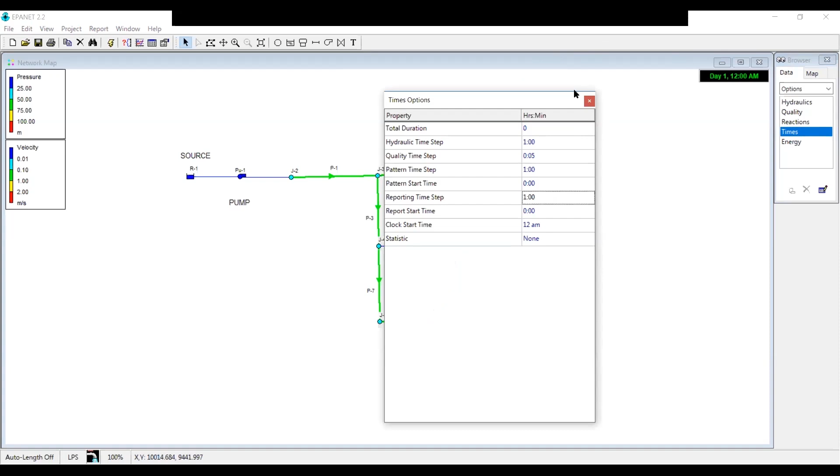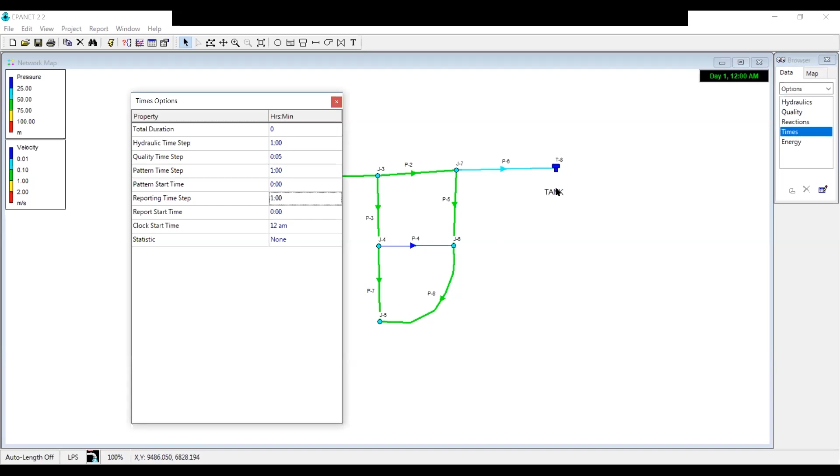Actually, this is the reason why we use tanks. The tanks work as daily regulators. In the night, the water will be stored in the tank, and in the morning, we will use the water in the tank. So by this way, I will not have to run my pump for 24 hours. Okay?

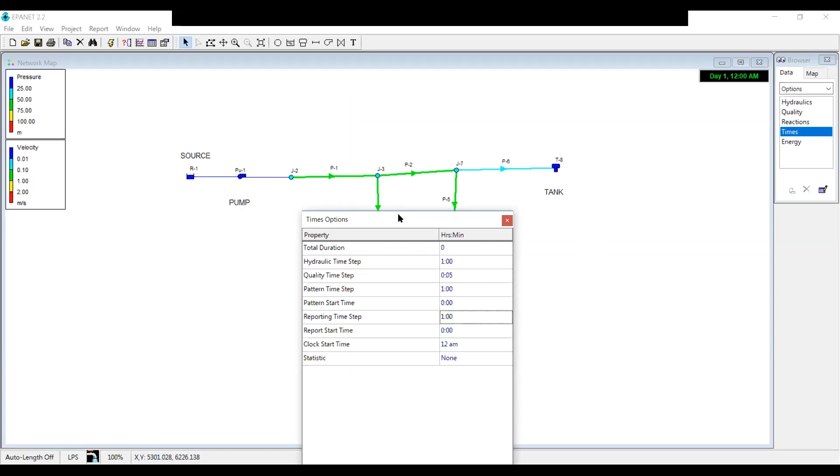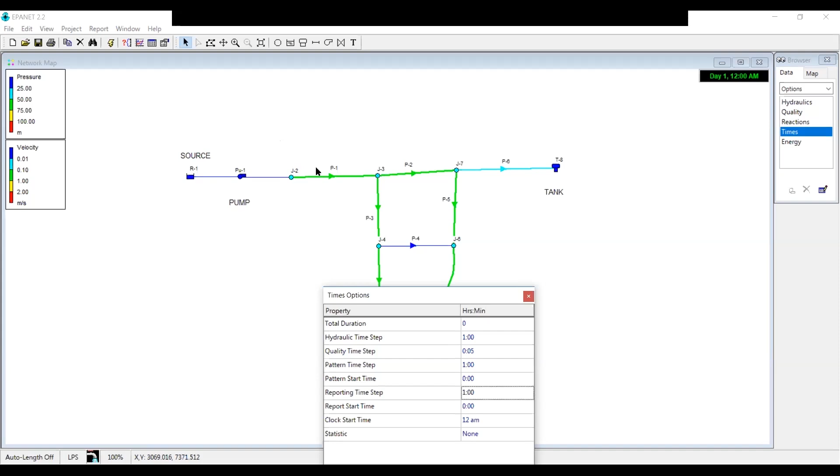But if your source is below your residential area, of course, you have to pump it. Okay? In that case, maybe you can put your tank here. Actually, these are the things that you will decide in the project. You will use your engineering judgment and you will decide these things.

Now, I want to run my system for 24 hours. Hydraulic time step. This is the time step that EPANET uses for its own calculations. This is not about me, this is about EPANET. But if you decrease this time step, it will be more precise. For example, let's give it 15 minutes.

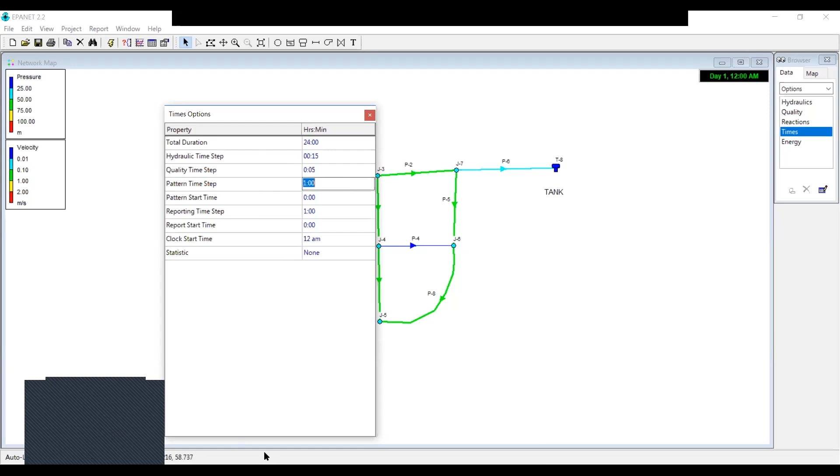Quality time step. EPANET can make water quality analysis, but we will not use it for this course, so we will not change this one. Pattern time step. Okay, you can take this pattern from the guide that I will share with you from the Turkish regulations. Now I will open it and show. This is the regulation that you will use. I will share with you.

It is Turkish, but most probably every group will have at least one Turkish member. So your Turkish member can read these numbers. Now I'm looking for the pattern that I'm mentioning. Yes, this one.

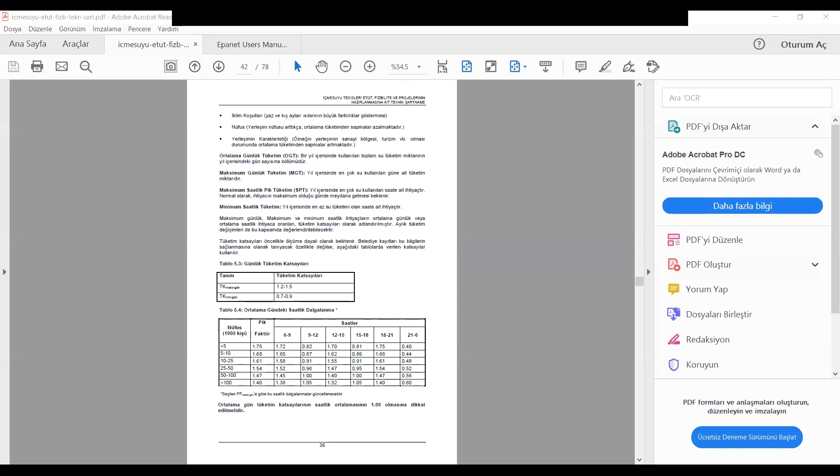This table says, for example, if your area's population is below 5,000, you can multiply the water consumption by these numbers. For example, the default number is 1, but in the times between 6 and 9 in the morning, water consumption is 1.7 times higher than the normal one.

Okay, so as we can see in this pattern, there are 3 hours, 3, 3, 3, but for this one only 9. So we can assume this one as 3 times 3 hours. You can add a new column here from 21 to 24, 0.4 again. From 0 to 3, 0.4, etc. So by entering these numbers to the pattern, we will obtain a new solution.

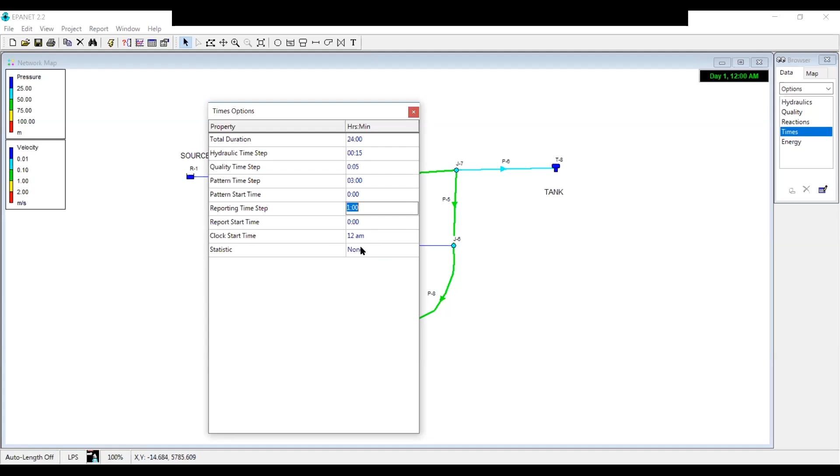I have written the pattern time step as 3 hours, pattern start time 0, reporting. Maybe I wonder what is the water consumption in the morning at 7:30, because if it is 1 hour, I can take only 7 o'clock and 8 o'clock, but I want the data at 7:30, so I want a precision of half an hour. Let's write 30 minutes, and the report will start from the beginning, clock start time. So your pattern will start from 12 a.m., from midnight. Okay, now we can close.

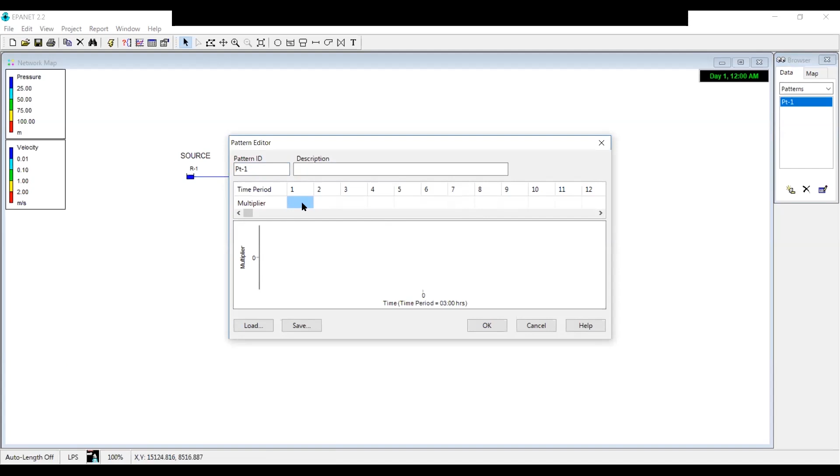And now we will describe the pattern. Browser, data, pattern. By clicking this one, we will add our new pattern. The multiplier. Now I will write the numbers which are in the Turkish regulations. It was 3 hours, so there should be 8 multipliers, because 3 times 8 is 24 hours. From midnight to 3 o'clock in the night, what was the multiplier? Please take a picture of this screen, and if I make it wrong, please correct me.

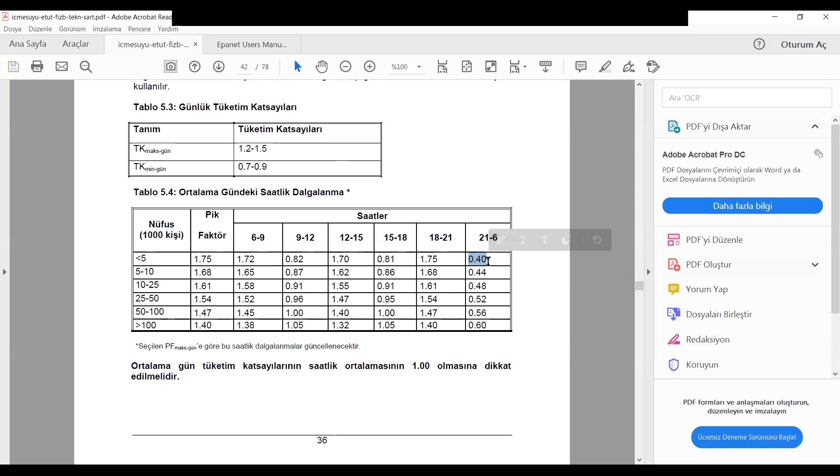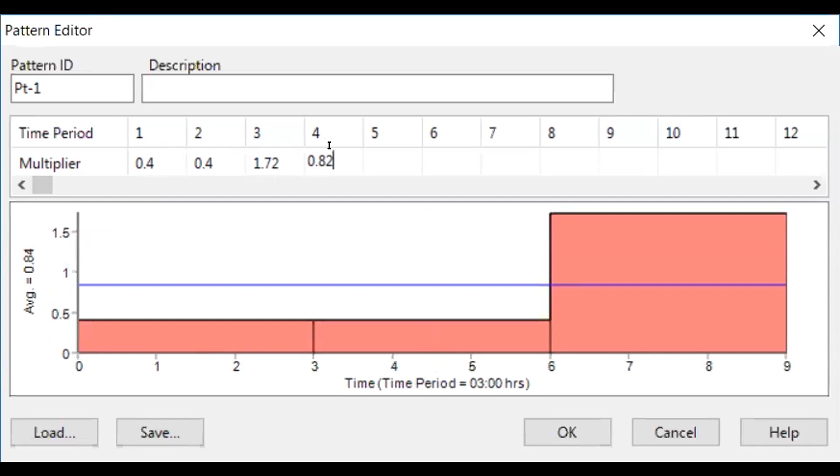From 21 to midnight 0.4, so that means from midnight to 3 again it should be 0.4. Okay, let's enter the values. 0.4. 2, this means from 3 to 6 o'clock, again it should be 0.4. This means from 6 to 9 o'clock. By the way, I am using population below 5,000, the first row. This is 1.72. This is 0.82. 1.7. 0.81.

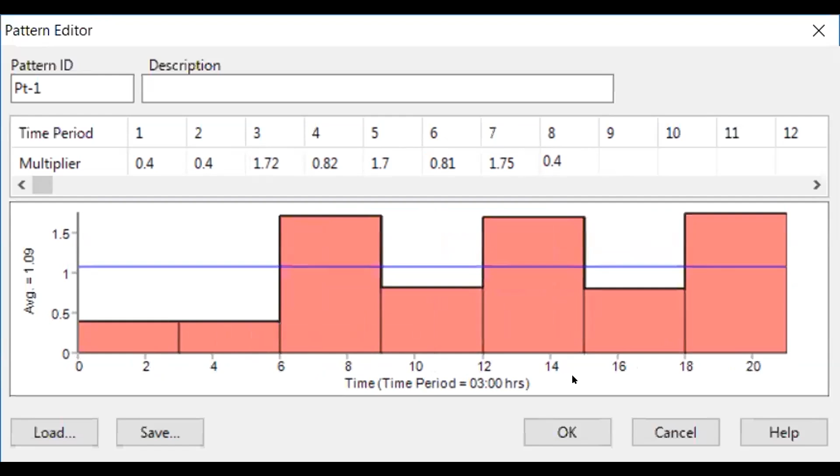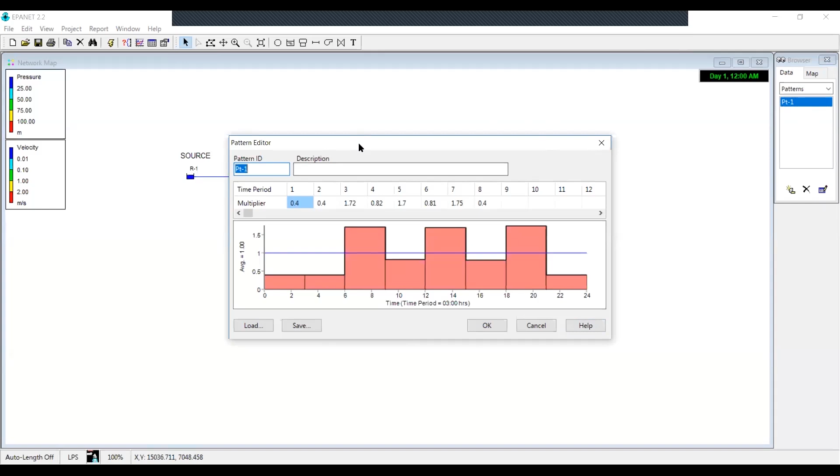1.75, and this is the last multiplier, which is in the evening from 9 o'clock to midnight, 0.4. Okay, let's check the pattern. Yes, I think the pattern is a pop-up window. It needs a new share. I am not sure whether you can see it or not.

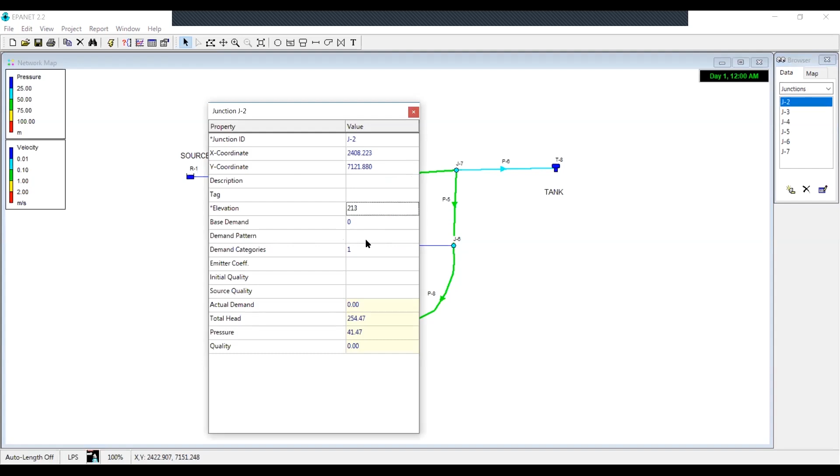Now I have described a new pattern, water consumption pattern, but my junctions don't know it, so I should inform my junctions. For example, double click demand pattern, nothing writes here. Now I will show you how to make changes of many things together. Edit and select all. Now I have selected all of the things in the screen, but I will just change the properties of the junctions.

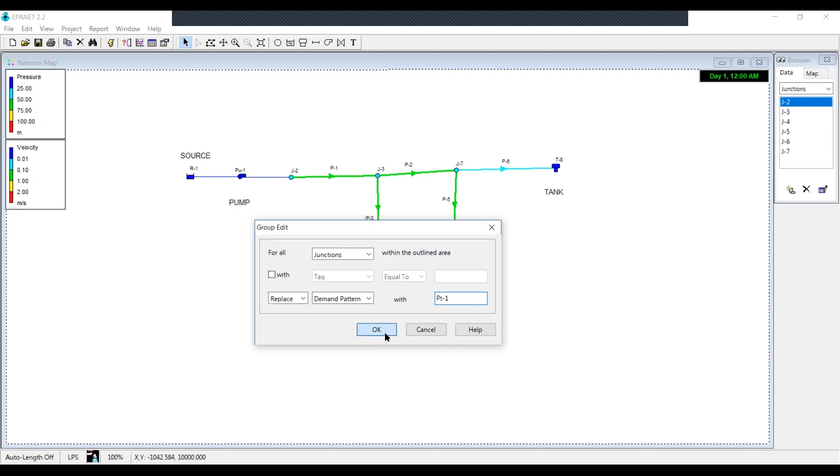Again, edit and group edit. Yes, you can see the little pop-up window, right? Yes, sir. Okay, for all junctions, replace demand pattern with... its name was, as I remember, PT1. Replace for all junctions, replace demand pattern with PT1. Okay. 6 junctions were updated. Okay, let's check. For example, this one, yes, demand pattern is pattern 1. Okay.

Let's run it again. Run was successful again. Okay. Now I can see at the time, at the beginning, 0 hours. But by sliding this one, I can see any result during the day. And by clicking this one, you can animate the results. Look, now the hours are changing. Look, the colors are changing depending on the daily consumption. Okay, so for example, at 9 hours, what's happening here, I can see.

And if you want to arrange the scale of these legends, you can right click it and you can arrange the colors here. In your project, you will take the values from the regulation. Again, the Turkish regulation, for example, says all the pressure inside the distribution system should be between, for example, 30 and 50 meter water columns. So that means you will arrange this green area because this is the acceptable area. For example, from 30 to 50. And you can arrange these ones. Okay. Now they are changed.

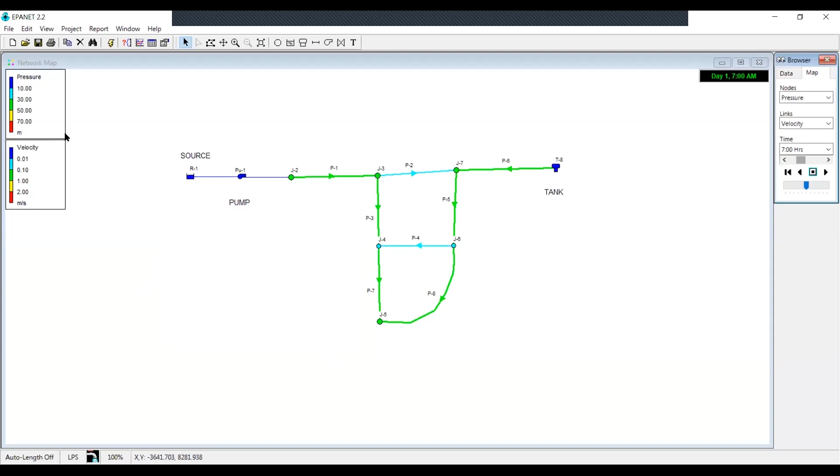And for example, the regulation says all the velocity in the pipes should be between 1 and 2 meters per second, for example. And you can arrange. Okay. And let's check these ones. For example, table. You can show the results as a table.

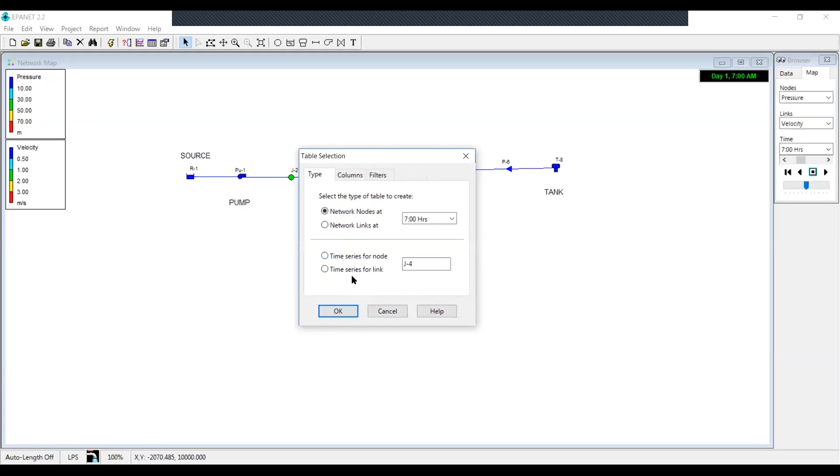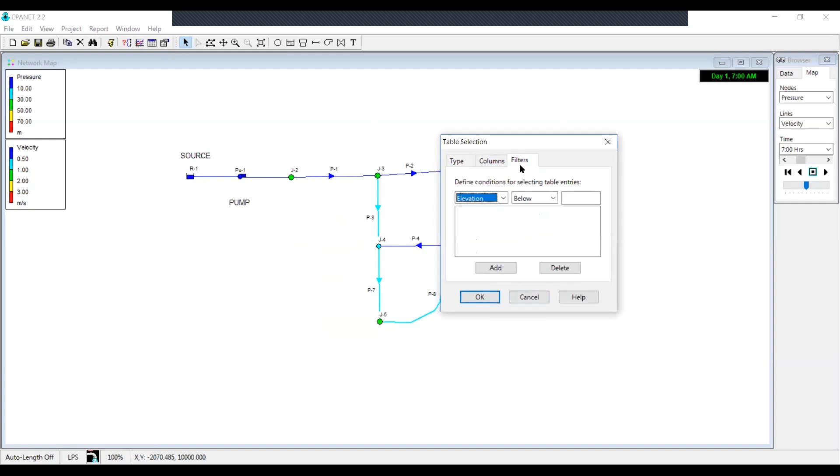For example, at junction 2, at this junction, which is just after the pump, time series for node: how does the pressure change during the day in this junction? I wonder that. So in the columns, I will just choose pressure, filter, no filter, click OK. Yes. At the beginning of the day, at midnight, the pressure is 45 meters. And it is changing during the day. You can observe the results from the table.

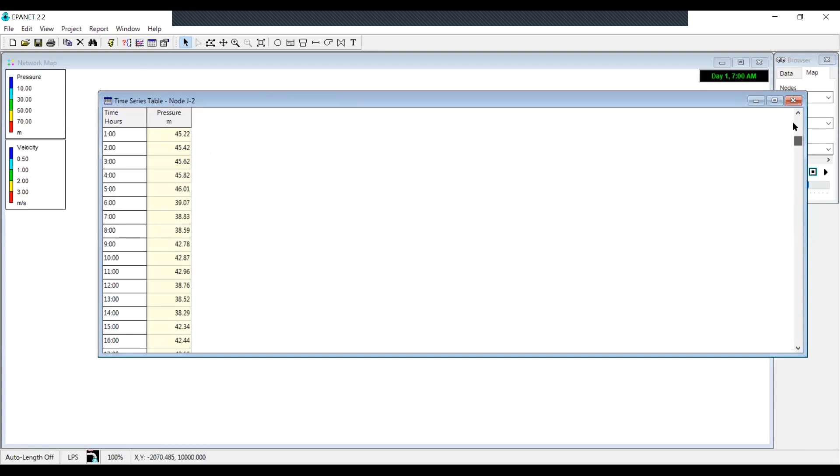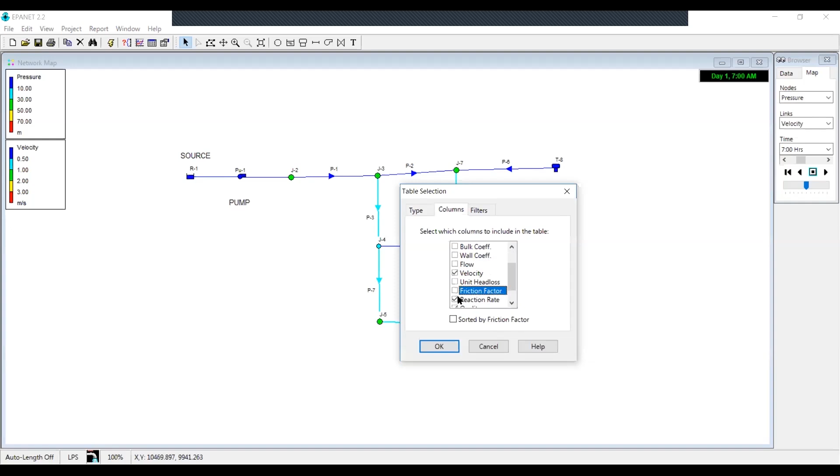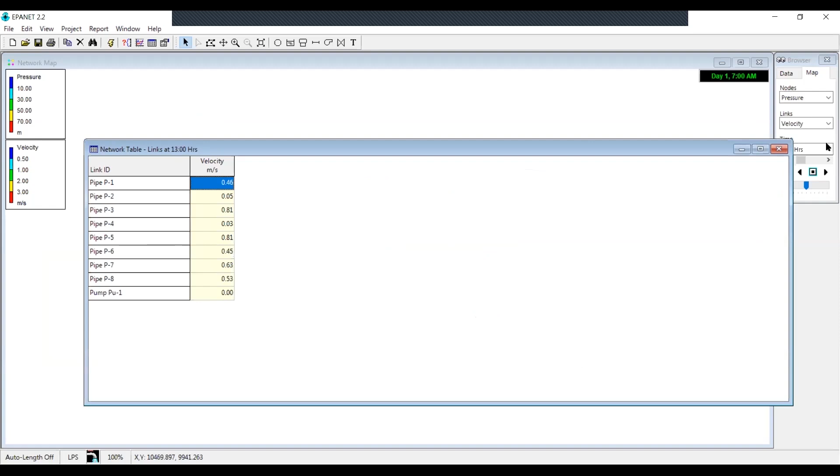Or I wonder, for example, the velocity in all the pipes. So network links at, for example, let's change the time, the afternoon. Columns. I just wonder the velocity. Yes. For pipe 1, it is 0.46 meter per second. Pipe 2, 0.05 meter per second, etc. You have to arrange your pipe diameters depending on your velocities as well. Because if the regulation says you shouldn't exceed this velocity, that means you have to increase your pipe diameter.

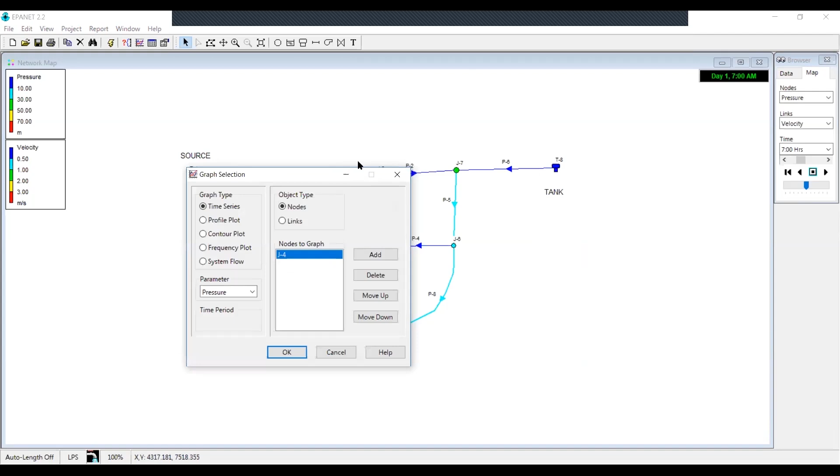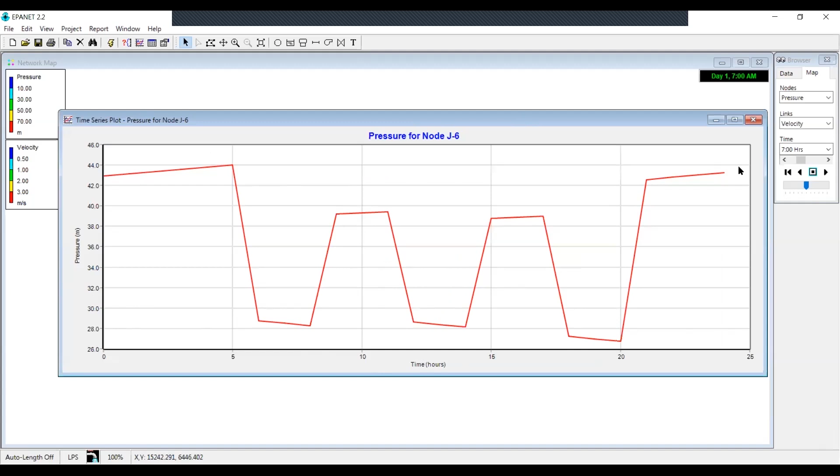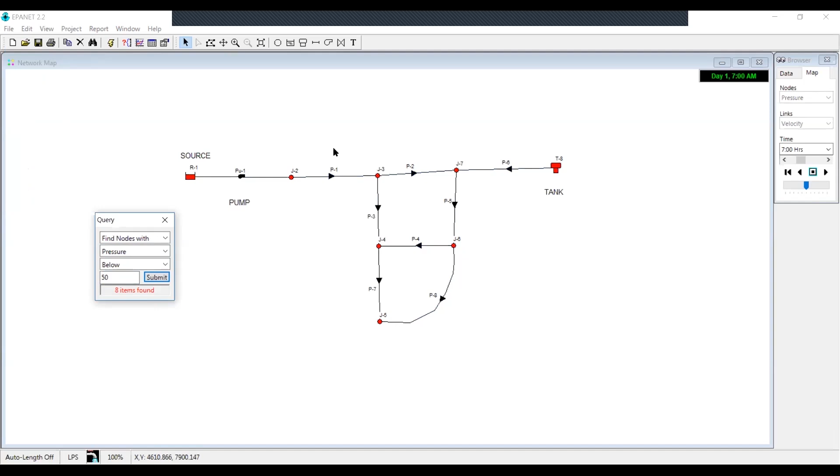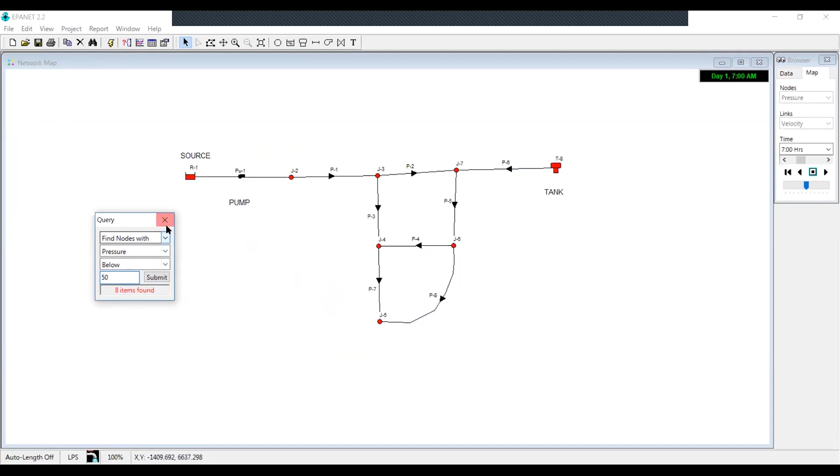What else here? Query this one. For example, if you want to find nodes whose pressure is below, for example, 10 meters. There is none, let's say 20 meters. 50. Yes. While you are checking your project, for example, if the regulation says all the pressures should be higher than 50 meters, you can write 50 and check whether there is a pressure below 50 or not by using this query. Okay. Any question?

Can you hear me? Yes, sir. Yes, hocam. Okay.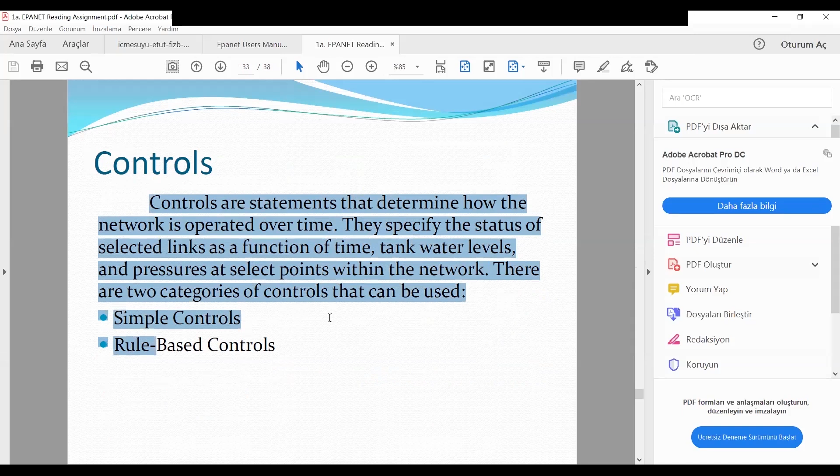Now I will show you, I think, the last thing before the data. After that, I will give you your data for the project. There are some controls. Controls are statements that determine how the network is operated over time. They specify the status of selected links as a function of time, tank water levels, and pressures at selected points within the network. There are two categories of controls that can be used: simple and rule-based controls.

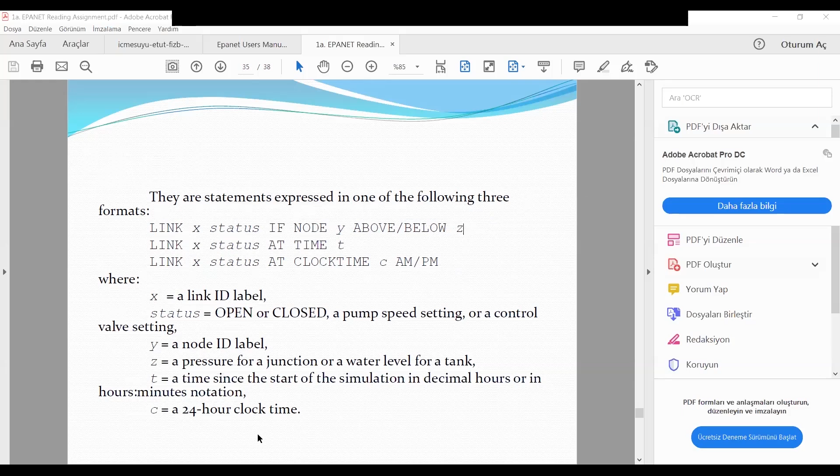For example, link X status is open or closed. For example, link 5 is closed if node 3 is below 20 meters. Again, I will share EPANET. For example, the maximum level of this tank is 6 meters, but I don't want the water level to exceed 5 meters. Okay, so you can tell EPANET: if the water level in this tank exceeds 5 meters, stop operating this pump.

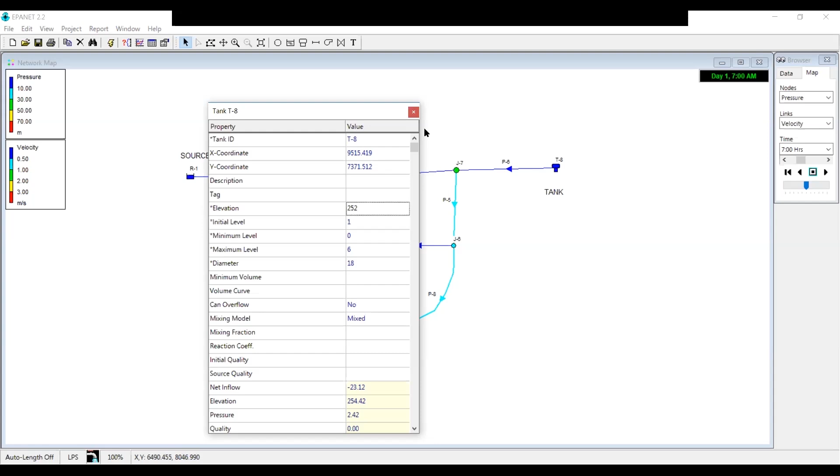And of course, this is not enough, because if the software stops the pump, it will be stopped eternally. So you have to open it again. You have to describe another command, like: if the water level in the tank is below, for example, 3 meters, open the pump again. You can use this kind of controls. How can you do it? Data, controls, simple, double click. You will write controls here.

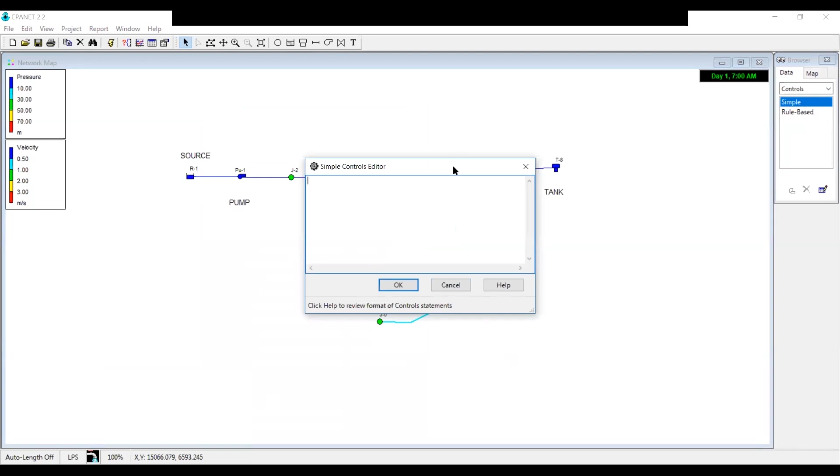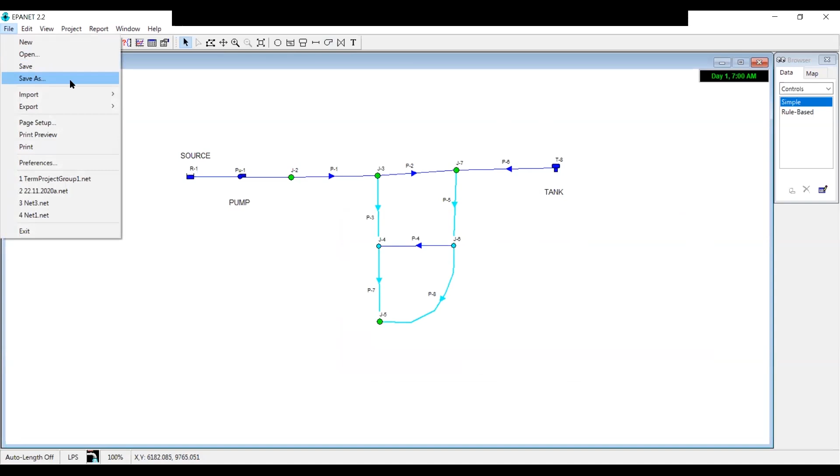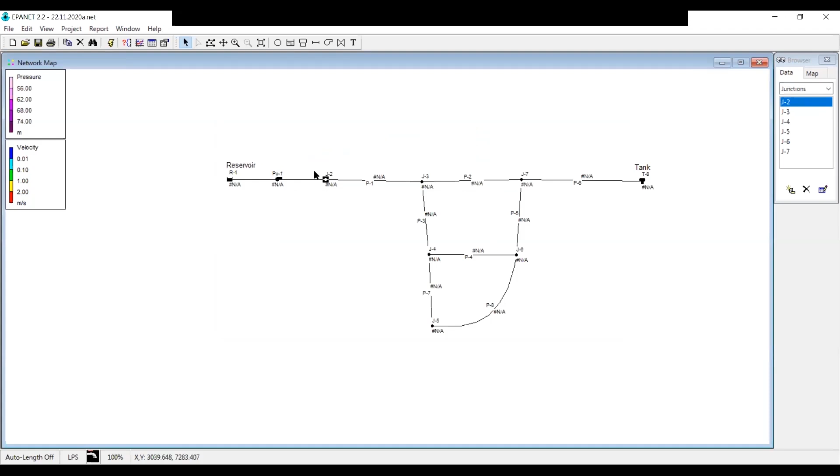Now I will open the file that I have created before, because you should find these controls by trial and error, not to lose much time. I will open a new file. First, let's save this one. Maybe we can use it in the future. Yes, this is the project that I have created before. I have described the controls for this one.

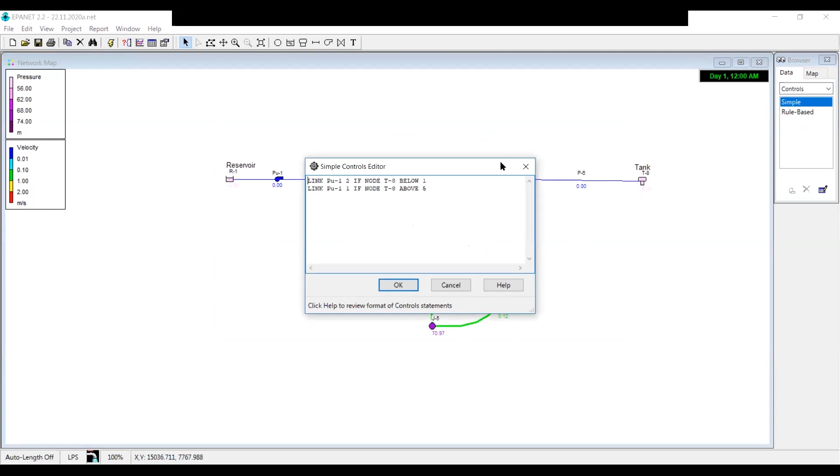Controls, simple. For example, what I did right here: link pump 1 is 2. 2 means run this pump 2 times stronger than regular, if tank 8 is below 1, because I see that the tank is emptying. This is an emergency. The water level is below 1. So I said, EPANET, run this pump 2 times stronger.

And as I said, if I don't write this text, it will run 2 times stronger eternally. So I should stop it somewhere. I wrote here, again, link pump 1 is 1. That means the normal power, if node T8 is above 5.

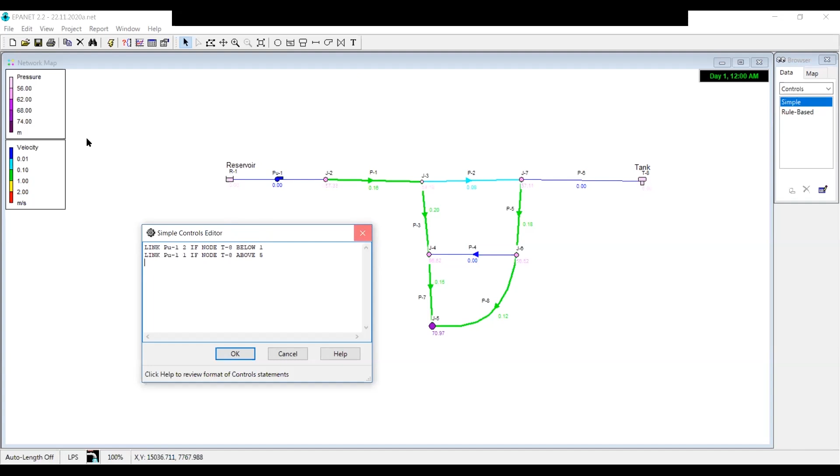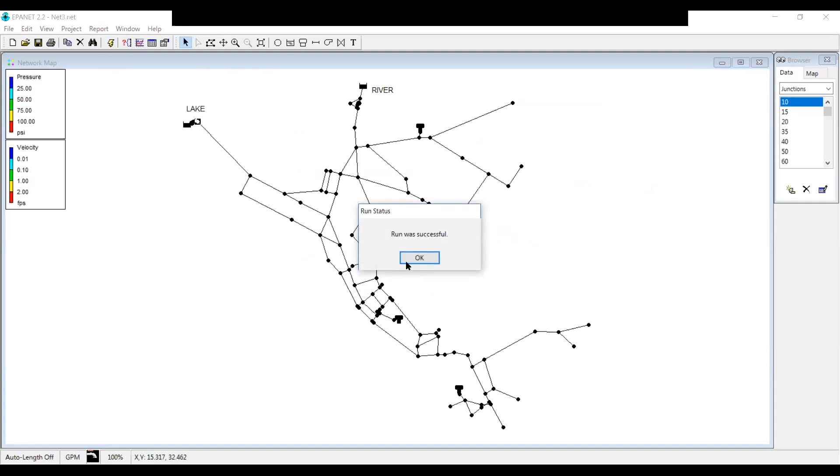I will show you some extra examples about this. EPANET has its own examples embedded inside it. File, open. In your computer, you can find it. Program files, EPANET examples. You have these files as well. For example, let's open net3. Run. You can use these files to have an idea about EPANET usage.

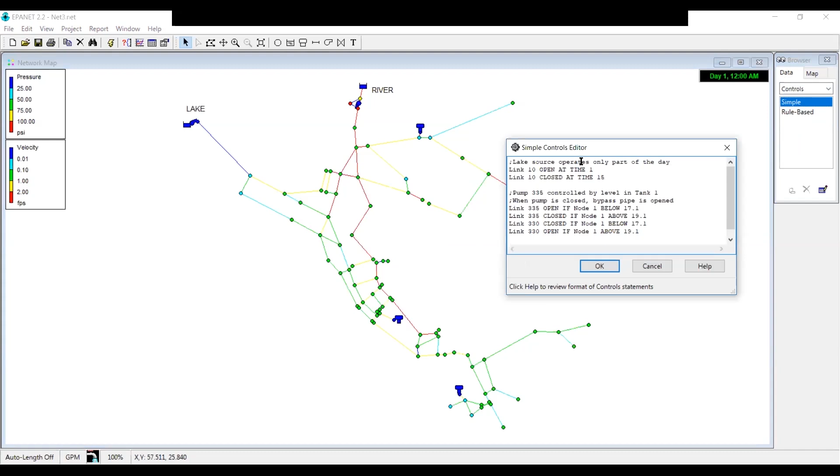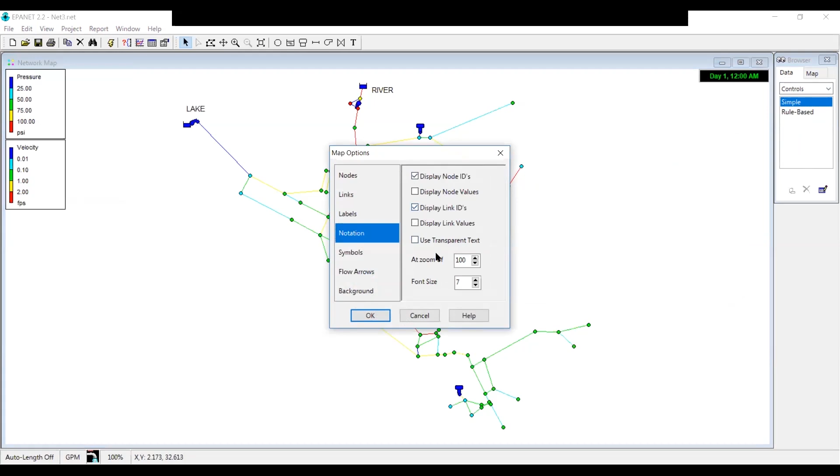For example, let's check what they described as controls. Controls, simple, double click. Lake source operates only part of the day. Link 10 open at time 1. But I cannot see the IDs, so first let's show the IDs. Display node IDs, display link IDs, okay. Link 10.

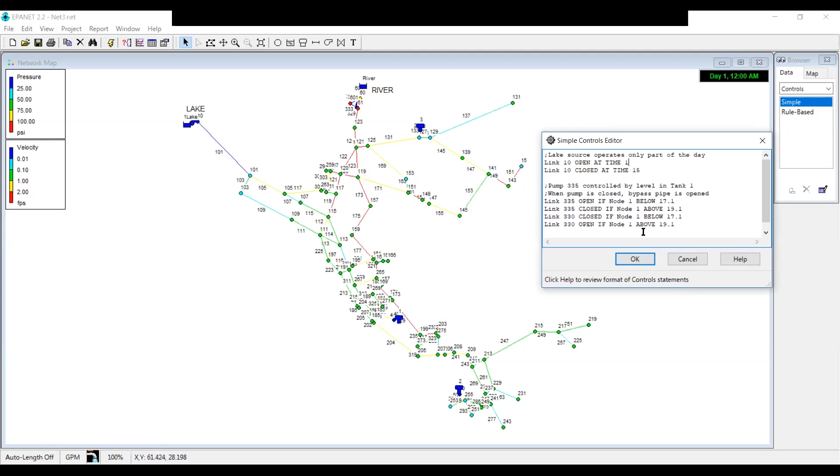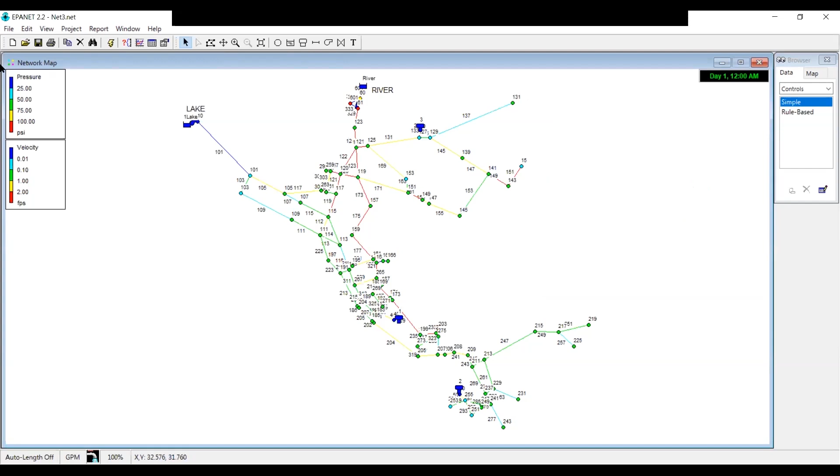Open at time 1. If you write time, that means timestamp, not the clock. They are all described in the user manual. And link 10 close at time 15. So this lake source operates only from 1 to 15, for example. This is a detailed thing, but maybe you will use it. Now, let's open another example.

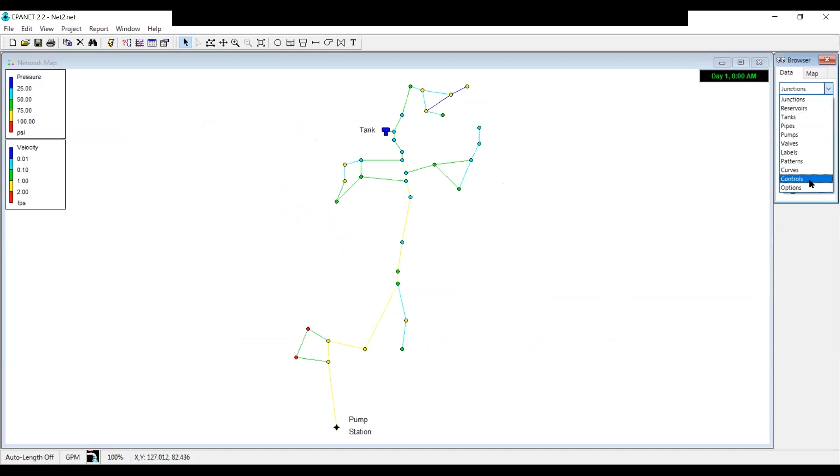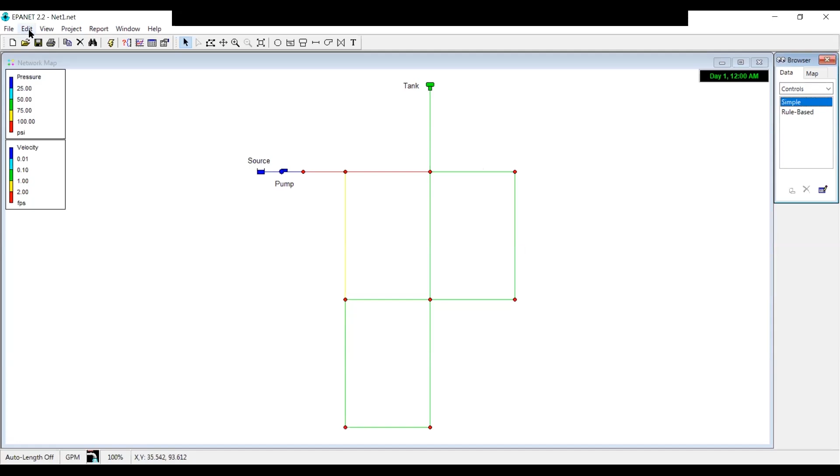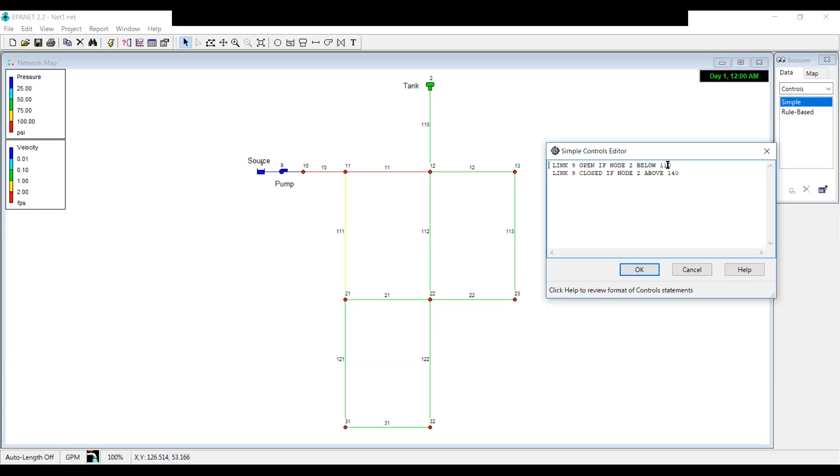There is no control in this project. Yes, this is a very simple project. It says link 9, but again I cannot see. I should open the labels. Link 9 open if node 2, the tank, is below 110. So they want to operate the pump only if the water level in the tank is below 110. And when the water level in the tank reaches 140, they will close the pump.